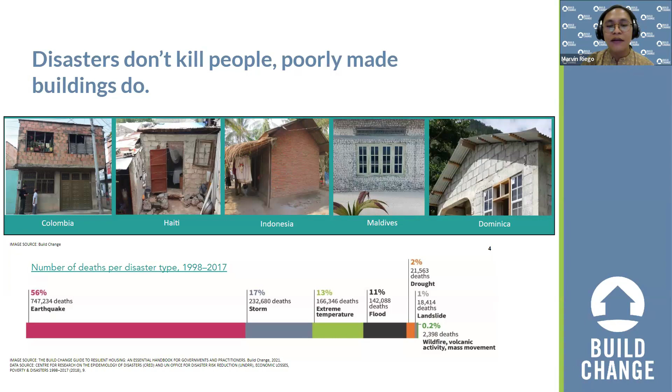In Build Change, we believe that disasters don't kill people. It's the poorly made buildings who do. So if we direct our efforts, if we direct all our initiatives towards strengthening or improving houses, then we can save more lives and therefore improve how they live.

So what is resilient housing? Before we really understand or grasp the idea of what resilient housing is, I believe we have to understand what safe housing is first. A safe house is a house built in accordance or in compliance with certain rules and standards. But there is no global standard for safer housing. The standards are locally set, so it depends on the planning, design, and one's way of construction.

In Build Change, we believe that safe housing can be achieved by following three major steps. Number one, it's very important that you comply with the rules and standards set locally or in your community. Number two is you have to reduce your exposure to hazards by relocation if possible. And number three is by investing in improving structural elements in your houses to minimize the dangers and improve the structure's performance against natural hazards.

So resilient housing exceeds and fulfills all this, and in several ways more. A resilient housing provides a safer, more secure, healthier space for its inhabitants. It is a secure financial investment and an affordable one. And also, most projects into resilient housing prove that it is scalable, sustainable, and adaptable.

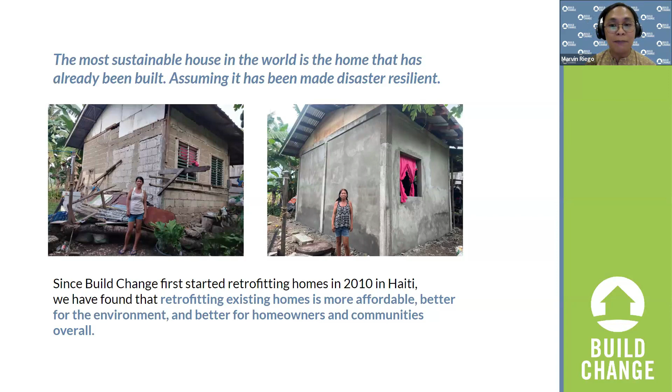Another thing is that retrofitting or improving houses is more environment friendly. It reduces impacts on the environment - if you scan the QR on your screen, you will be directed to the recently released study made by Build Change about saving carbon. According to the study, retrofitting is cheaper and can save up to 18 metric tons of carbon emission per house. On a global scale, we estimate there is an opportunity to save 4.8 gigatons of carbon emission while addressing more than 268 million inadequate housing globally and saving lives.

So in a nutshell, that's what Build Change does. We try to advocate and promote resilient housing so that everyone can have access to it, and so we can save more lives and improve their way of living.

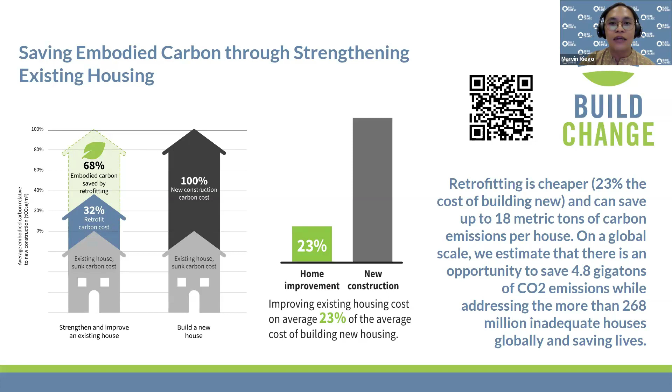To get to know more about what we do and how we do things, our next speaker is my colleague Liva Shrestha. She is currently in Nepal and set to do a pilot project to understand the environment and the need of the market for disaster resilient and climate resilient housing program. Over to you, Liva.

Thank you so much, Marvin. Good morning, everyone. My presentation today will be, as Marvin mentioned, how we are working in Nepal to make resilient housing more accessible to vulnerable people. And I will be talking about our approaches on how we get to what we want to achieve.

In 2015, a massive earthquake struck Nepal, and in the aftermath, more than 1 million houses were damaged, and about 3.5 million people were rendered homeless. When we look at the housing stock that was affected, about 74% of the housing affected were of rural typology.

If you look at the map, the circles represent data on damaged buildings across different districts in Nepal. The green colored ones have a rural typology - meaning mud-based houses. In Nepal, it is estimated that more than 95% of the houses are non-engineered - not designed by engineers, but constructed using local, traditional practices.

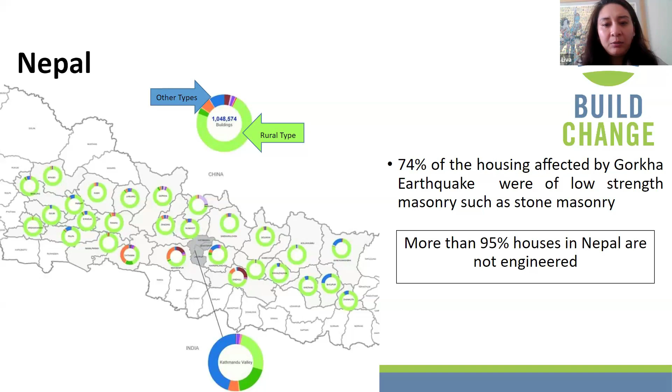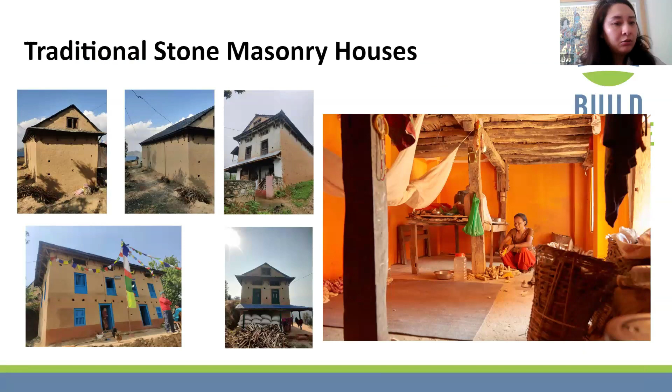This is a picture of a typical rural municipality. As you can see, most of the houses are very similar typology. These traditional houses are typically 2.5 stories - 2 stories plus an attic at the top. They have wooden floors with wooden pillars supporting the floor, and the roof is typically made of wood. Traditionally, the roofing cover is clay tiles, but these days CGI is a more popular alternative.

According to a rapid visual survey carried out by the National Disaster Risk Reduction and Management Authority in Nepal, assessing more than 10,000 buildings across 13 districts, it was found that more than 90% of the houses were vulnerable to earthquakes and needed some form of intervention. If this is the case for public buildings, we can expect the situation to be even worse for private housing.

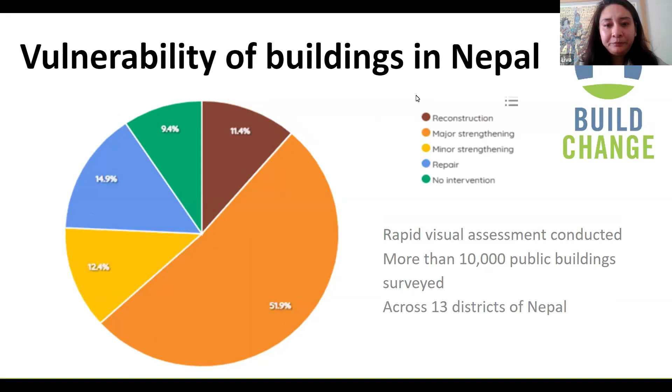We believe that our resilient housing program should be implemented in a 6-step value chain, and at each step of the value chain, the focus is on optimizing resources where possible and to maximize the effectiveness of the program.

Before working on any location, it is always vital for us to obtain information about the disaster and its effect on the housing stock. In post-disaster situations, the nature of damages in the building stock gives a good indication of the vulnerabilities that existed in that typology, and helps explain why these buildings collapsed. This is vital information for engineers, as it gives them clues on how to design a safe building or a strengthening scheme.

Before designing housing interventions, we always carry out a housing subsector study. This study looks at the prevalent housing typologies in that location, their typical configuration and layout, common architectural and cultural preferences, construction materials used, and what materials are available locally. The study also looks at the skill level of local builders and common construction practices in the area.

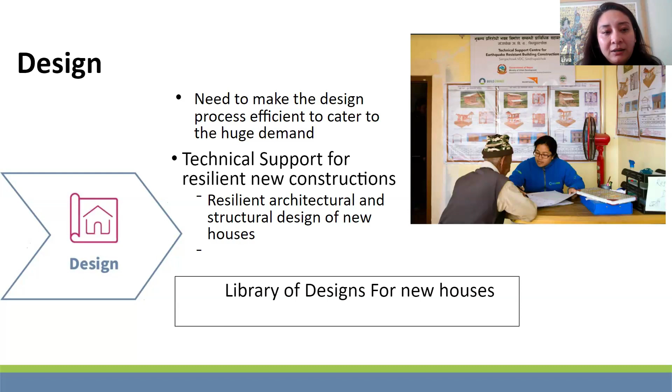Now, in the case of homeowners who already had an existing but damaged or vulnerable house, we promoted home strengthening measures based on a type design. A type design is a ready-made home strengthening design that can be readily used for a building that met a predefined list of criteria.

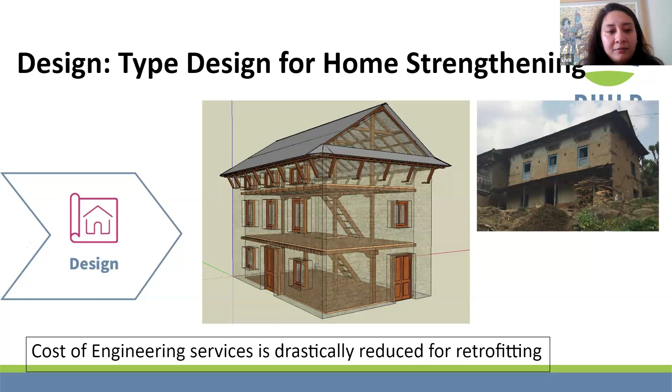This type design cut the design time by many folds, and has the potential of being operated by a non-tech person, such as an MFI as well. So we can see how much cost is saved here in terms of engineering time.

The next step of the value chain is finance. As we found out during the information collection phase, most homeowners had to combine personal savings and then a loan from MFIs. The first few houses that we supported received some grant support from Build Change. Typically in a post-disaster situation, there are government grants available that would also cover part of the home strengthening costs.

New construction can be made more affordable by recommending building a stronger, smaller core house first, with provisions to expand vertically or horizontally as homeowners come into more money. For retrofitting, affordability can be improved by allowing it to happen incrementally, doing a few things at a time rather than everything at once. Each increment is designed to cost less than $2,200 so homeowners can access the collateral-free loans available for that amount.

Now the next step is the build step. Before actual construction starts, we implement capacity building activities: training homeowners so they know how to manage the construction site, and training builders to carry out retrofitting works. This is usually done in the form of on-the-job trainings.

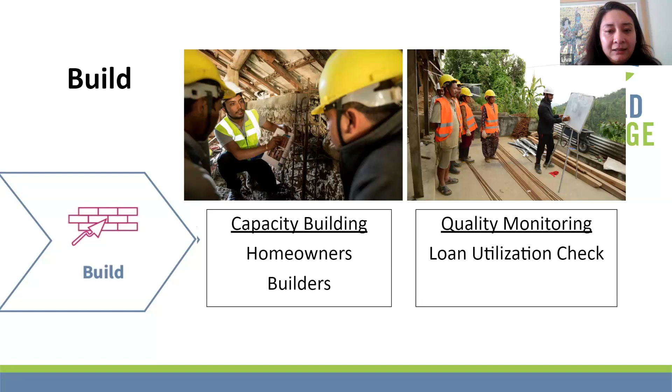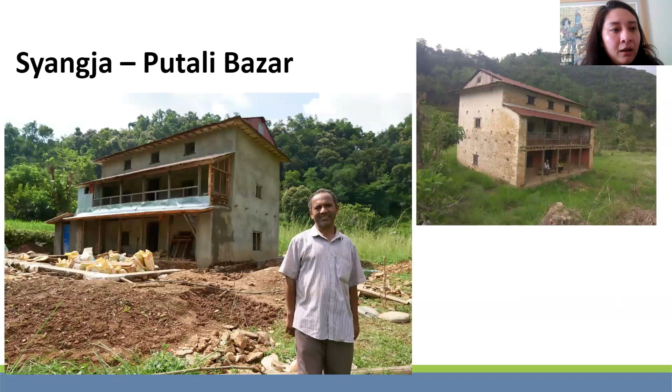So we come back to the question of how we can achieve sustainable and safe housing at scale. First and foremost, we need to make engineering solutions simple to use and accessible to technical as well as non-technical people, such as homeowners, builders, or MFI loan officers. We need to empower homeowners to take the driver's seat for a housing solution to be sustainable, so we advocate for homeowner-driven construction.

We must increase access to financing for constructing safe houses through MFI partnerships, providing resilient home loans. We need to make technologies more affordable through efficient designs, and by providing an incremental approach to reach the safe housing standard. We also need to reduce the cost of engineering services by being innovative with technology and other tools to be more efficient in delivering our services. Most important of all, I think we need to prevent disasters by making houses safe. Thank you so much, and back to you, Marvin.

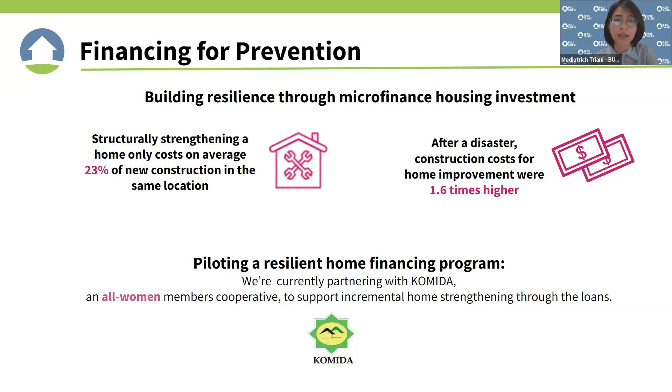The next one. Okay, so this is the basis that we use when we started to implement the pilot and planning the pilot. So what we do is that we started with assessment.

We started to see and collect data, what kind of building typology or housing typology that the members currently living, and what kind of material preferences, design preferences, occupancy, like number of occupants, how they use the house in terms of day and night, whether they use it as a business or just for living space.

And then also identify the hazard risks such as flooding, earthquake, if it's in a tsunami zone, whether it's a landslide, and as well as assess the typical financing that the cooperative provide for home improvement.

And then the second step is to share the findings to the MFI partners, in this case Komida, so what kind of preferences that the member would like to have in their house, what kind of improvement they like to do.

And then based on that, once we analyze together with Komida or the MFI partner with regards to the preferences and demand, as well as the financing aspect in the typical payment and typical financing of the cooperative, we started to design the solution.

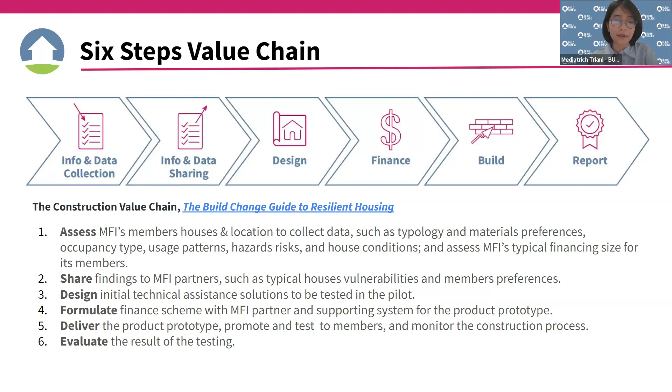After that, within a minute, it will come with a rapid assessment report and a design solution, as well as design costs based on the selected payment capacity. We also help the MFI partner build a construction manual together, so that the builders appointed by the members or homeowners will be able to use it.

As part of the people component we emphasized earlier, we need to maintain the demand, or always maintain a party or someone that wants to have a safe house. That's why it's important to prepare a training module and training resources, and deliver training to the homeowners on why it is important.

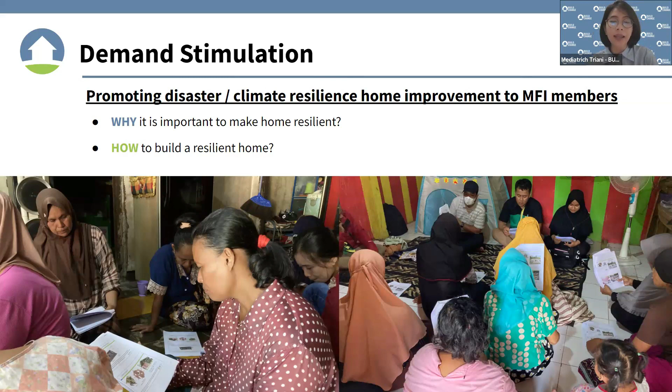This is an example of how we try to tailor some of the marketing materials, because we know that in Indonesia there's quite a variety of building preferences, material preferences, and construction skill differences. That's why in each branch of the MFI or MFI partner, we always try to fit what is locally preferred by the members in terms of construction materials and techniques.

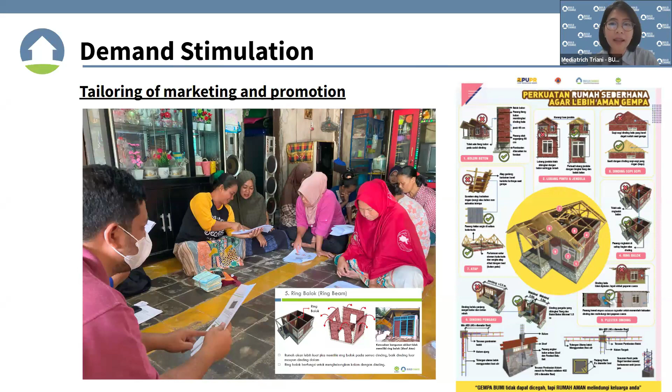On the financing side, as I mentioned, we developed the home assessment tool, and the homeowners or members will be able to select what kind of design they think they would be able to do with their current financing capacity.

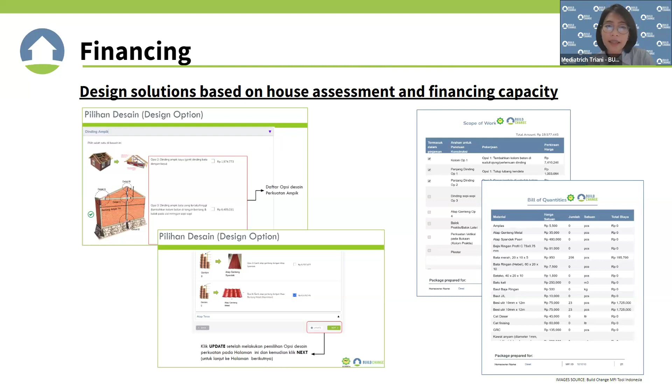The homeowners also have the option to choose what kind of loan package they would like to see. There are auto-generate and custom loan packages, where auto-generate is something the homeowner could put certain numbers into.

If you see on the left image, the homeowner could put in some number that fits their savings or financing that they have now, and the solution will give options within their financing capacity. Or they could use custom loan packages where they select by themselves any action items they would like to do.

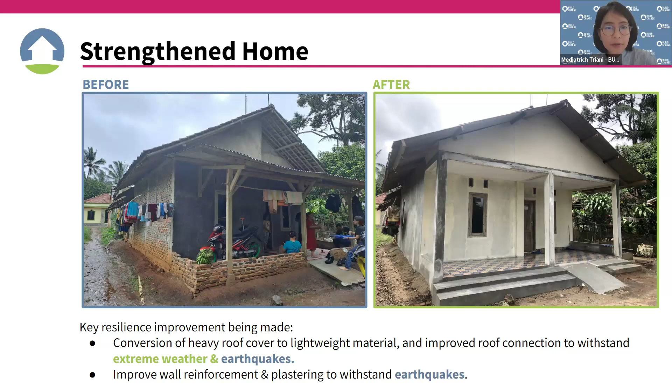This is my last slide of the presentation, so I'd like to close with a story. Indonesia was the first country where Build Change operated, and we're celebrating 20 years of Build Change this year. Build Change always starts with the people.

I want to share the story of one of the many mothers we work with, including Eva. Eva lives in Padang, West Sumatra. She experienced two major earthquakes, which left her concerned about how to keep her family safe, especially her 2-year-old daughter. Eva told us she was incredibly scared because her baby was alone in the bedroom, and reaching her was difficult when the earthquake happened, as she couldn't even stand. So she crawled to reach the baby and got her out of the house safely.

Her family's house was damaged, and their only option was to keep making repairs by themselves the best they could. Build Change came and we provided technical assistance, working with Eva on what kind of house improvements she would like to do.

Through this, we would like to emphasize that it's important to meet people where they are on the ground with simple, safe design, easy quality control procedures, and access to subsidies or loans. I guess that's all for Indonesia. Thank you, everyone.

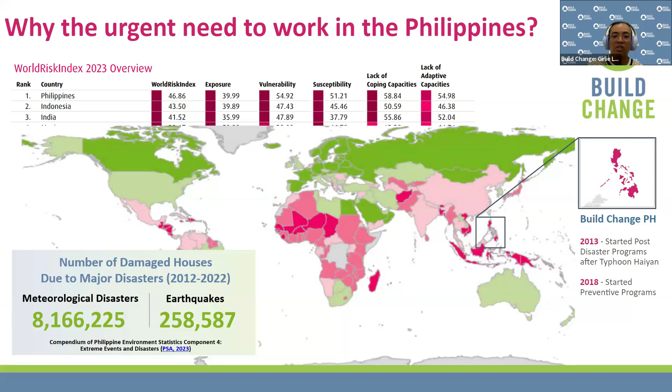Having said that, we at Build Change really see the need to start working on preventive initiatives in the country. The next slide focuses on the prevention initiative: the disaster resilient housing microfinance program.

Now, why work with the MFIs and how huge is the market? With all those statistics that I mentioned before, there is an undeniable potential market for house strengthening for the Philippines, specifically for the most vulnerable. And this vulnerable population represents the economic segment that is served by the country's microfinance institutions.

Housing microfinance is indeed gaining momentum in the Philippines, and it requires a needs-based or client-focused approach. The 2019 study commissioned by Build Change indicated about 8.6 million of the 15.6 million vulnerable units would need retrofitting or strengthening.

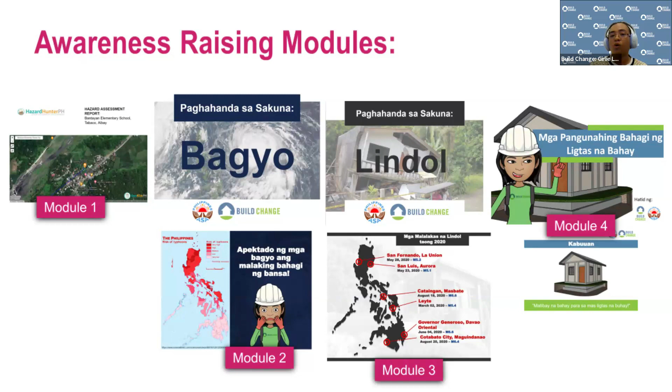We deliver this either face-to-face or through online platforms. The next slides will show you some of the awareness raising activities that we did with the communities. Further, you could see that we also are involved in training of trainers, as well as several awareness raising caravans that involve a larger number of people.

The next slide now talks on our intervention focusing on the barrier on money. If people don't have enough money to build a safer home, they won't. So an essential part of our work in Build Change in the Philippines is focused on widening access to affordable and appropriate financing to build and strengthen resilient homes. We were the first country to start these initiatives in partnership with the microfinance institutions in 2018.

Specifically in this case, we collaborate with the MFIs because they have years of expertise in servicing the target low-income communities. In this program, we at Build Change provide our partner MFIs with technical assistance and advisory services from end to end of the product development process, which means from conception. The product that we aim to develop is appropriate for homeowner-driven construction, meaning that it takes into account the hazards that the homeowner is vulnerable to and the homeowner's demand, preference, and capacity to repay.

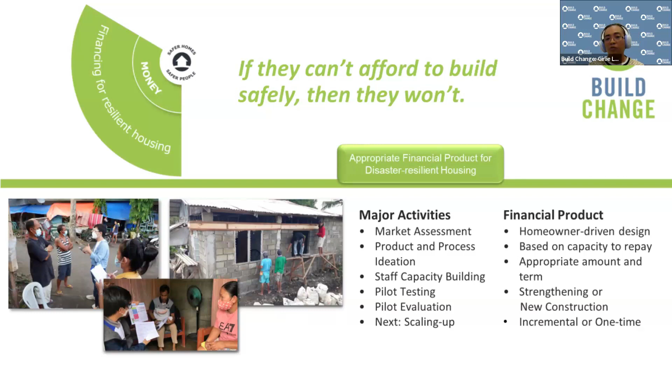Under this program, the partner MFI may opt to offer support for strengthening or for new construction. We provide flexibility for the homeowner to do improvements either one time, or like most low-income families would do, to improve or build their houses incrementally or in multiple phases.

The next slide addresses the concern on technology. We want to ensure that the right building designs and technology are available locally, cost efficient and affordable, and would use existing culturally preferred technologies wherever possible.

Build Change also recognizes the local technical capacity in each country that we work in. Therefore, in this project in the Philippines, we prioritize builders who are from the communities and work to enhance their capacity.

The next slide shows us the start of leveraging Build Change's technical assistance platform. For this program, we have developed BCTAP, an end-to-end solution that enables efficient data processing. As you can see, we start with collecting house assessment results. This tool can identify required house strengthening interventions, automatically prepare bill of quantities, and enable loan utilization check.

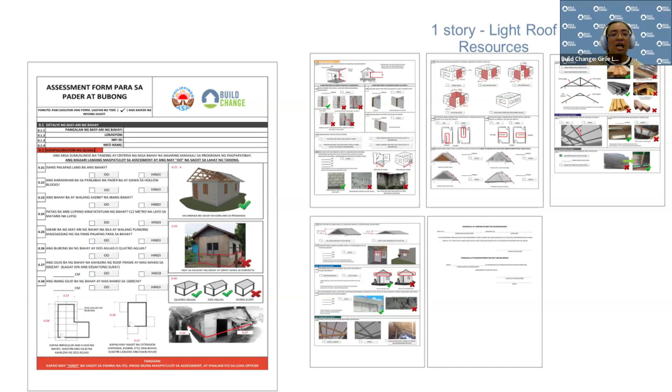On the next slide, once the builder or the microfinance officer fills up the part of the app focused on assessing the houses, the information can be uploaded to a web application, which the next slide will show you.

The web application generates a comprehensive list of actionable items essential for enhancing the house's resilience, along with associated costs. So if the assessment part tells you the structural health, the web application tells you the scope of work necessary to make the houses resilient.

The next slide shows the actual tool and an example of a list of recommended strengthening measures, or the required scope of work, with corresponding costs.

If the capacity to repay of the client doesn't match the overall cost of the strengthening intervention, the tool provides guidance to homeowners on what to prioritize, while also providing flexibility for the homeowner to choose a specific scope of work.

The next slide shows us the chosen scope of work. The tool also provides the bill of quantities, which itemizes the materials, labor, and similar costs related to the intervention needed.

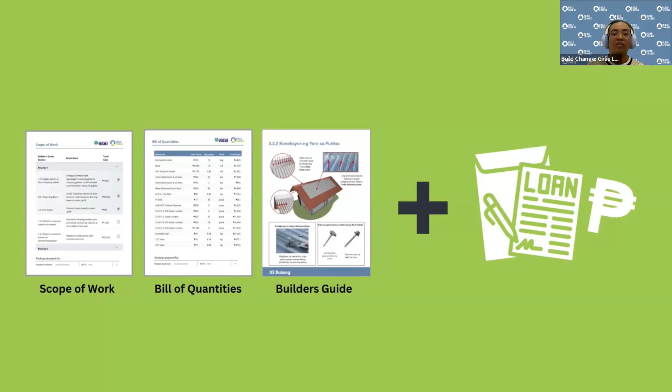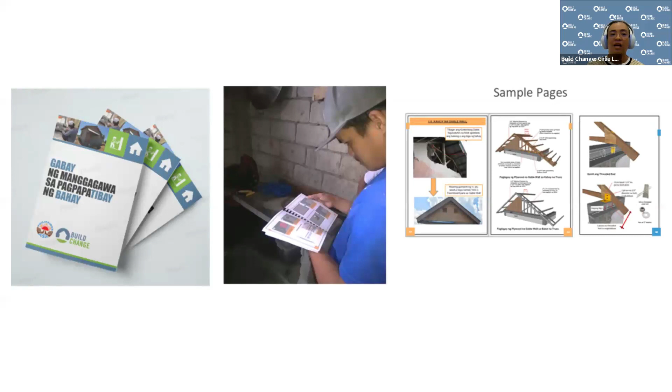The next slide shows some examples of the contents of the builder's guide. As you can see there, that's an actual builder utilizing our builder's guide in the Philippines.

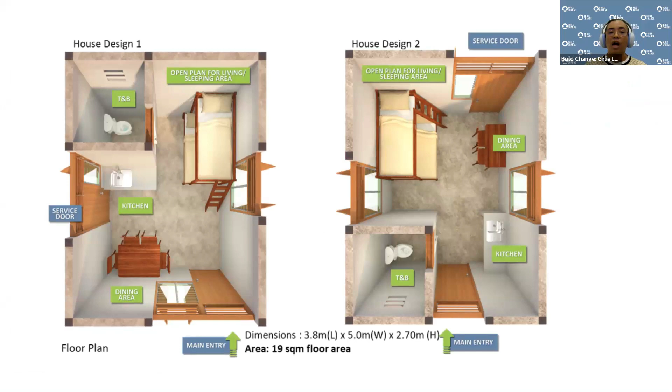The next two slides show some of the designs we do for our new construction. As you can see, it has provisions for horizontal expansion as well.